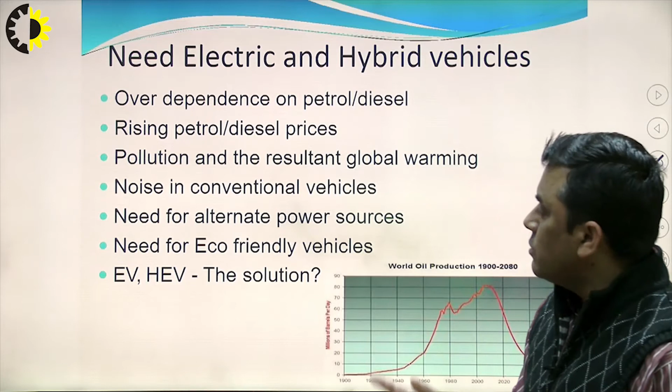So why do we go for electric and hybrid vehicles? These are the reasons why we should go for them. That is why it is included in the engineering syllabus. This is the answer to the need for electrical and hybrid vehicles.

Now what do we mean by this? An electrical vehicle is an automobile that is propelled by one or more electric motors using electrical energy stored in an energy storage device. The primary components of any electric vehicle are the motor, controller, power source, and transmission. This is what we mean by an electrical vehicle.

It means we are going to use electrical energy, and through that energy an electric motor will be governed, which will govern the rotation of the wheel and transmission of power through electrical means. I am not going into much detail of electric or hybrid vehicles, but as per our syllabus, we will discuss only the elementary things here.

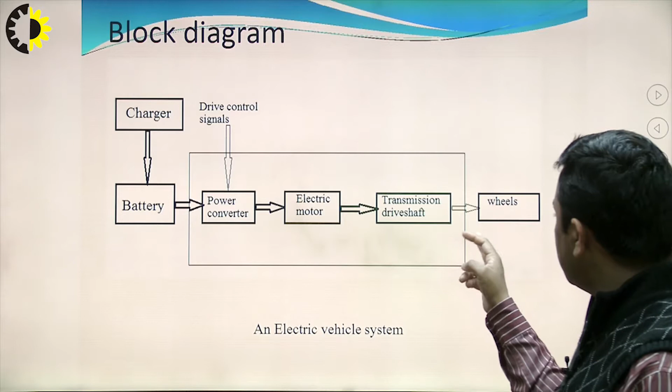So first is why do we need them, second is what do we mean by electric vehicles. This is the block diagram. Obviously if we are using a battery, then there must be a charger, a power converter, then for the power converter there must be an electric motor, then the electric motor controls the transmission or driveshaft, then the wheel. So this is the block diagram of how power is transferred from the battery to the wheels.

We can also see this in terms of components. Motor: generally we use a brushless DC motor which is able to self-start. Controller: to control the brushless DC motor for increasing efficiency, reliability, and battery life. This is the purpose of the controller. Charger: to connect batteries with the electric source.

Contactors: an on-off switch powering up the drive circuit when we turn the key. So when we turn the key, there is a contact between two components, an on-off switch as in our electric switches. It connects and powers up the drive circuit when we turn the key. Battery: rechargeable batteries are generally used.

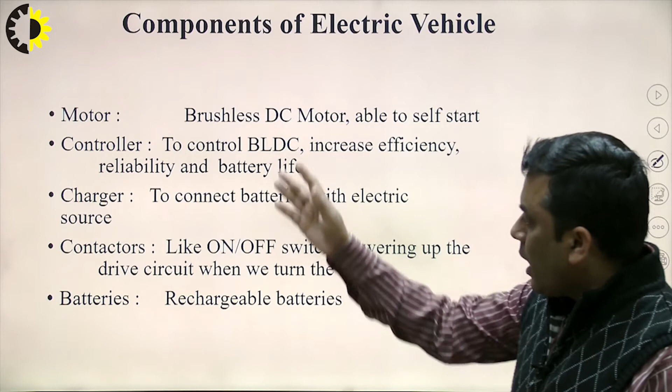I am not going into the specifications of these, because that is related to the design of electric and hybrid vehicles. Here we are introducing only the components and the term 'electric vehicle', why we need it, and what its components are. Which type of motor, what power, how much RPM - I am not going into that much detail, I am only telling you these are the components.

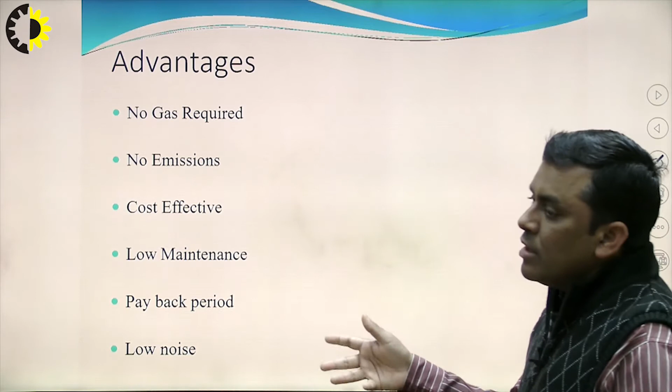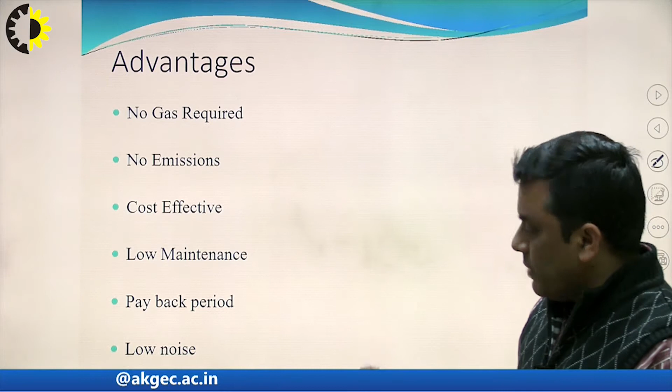Advantages of electric vehicles - obviously need and advantages both are meeting here. No gas required as in an IC engine, no emission, cost effective, low maintenance, payback period is very soon, low noise, because in an IC engine there are a number of components, whereas in a motor there are fewer components, so the noise level will be lesser.

Yes, this is also one of the drawbacks or disadvantages of electric vehicles, but we have to come to some trade off, some optimized solution, so that we can go with an eco-friendly and good solution. So, this is the electrical vehicle.

So, if electric vehicle is not fulfilling the requirement and IC engine is having certain issues, then what is the solution? The solution is hybridization, the concept of multiple sources of power. Here we are talking about two sources: one is the electric source, another is the IC engine.

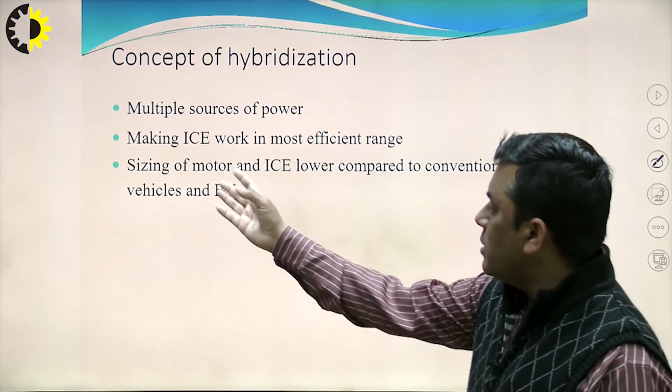So, the concept of hybridization between these two sources means making the IC engine work in its most efficient range, with proper sizing of motor. Motor size is a matter, battery life is a matter, battery recharging is a matter, so we can reduce these issues with hybridization, with sizing of motor and IC engine lower compared to conventional or electric vehicles. This is how the concept of hybridization comes into the picture.

Now, which type of hybridization, how much hybridization do we require? On the basis of degree of hybridization, we can classify it into three categories: mild, medium and full. Mild means they feature idle stop function, regenerative braking is there, but are not capable of using the electric motor to propel the vehicle. This is what we mean by mild hybridization.

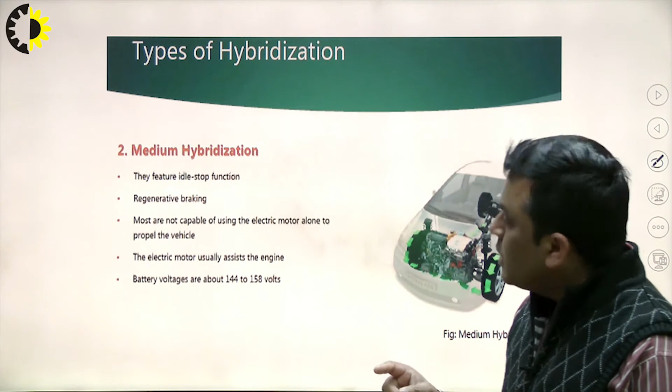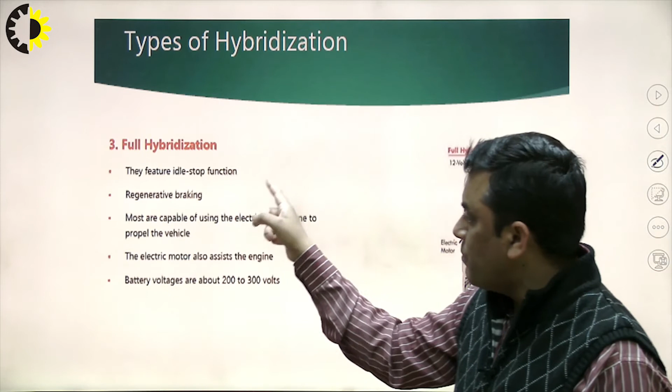If I go with medium hybridization, most of these types are not capable of using the electric motor alone to propel the vehicle. So, not only the electric motor is used to propel the vehicle, but along with the IC engine it can be used. And if I go with full hybridization, most of these are capable of using the electric motor alone to propel the vehicle.

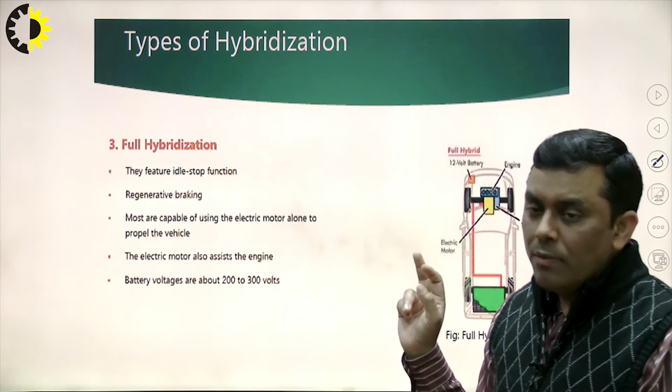So, mild, medium and full. In mild, we are not using the electric motor to propel the vehicle, whereas in medium, not only the motor but the IC engine also. But in full hybridization, the electric motor also assists the engine. This is the meaning of full hybridization.

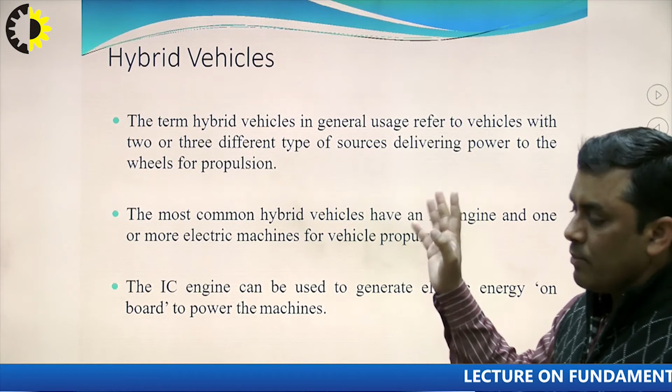Now, if we understand the concept of hybridization, we must understand these terms also. What do we mean by hybrid vehicle? The term hybrid vehicles in general refers to vehicles with two or three different types of sources delivering power to the wheels for propulsion. Two or more sources, if combined together, is hybridization.

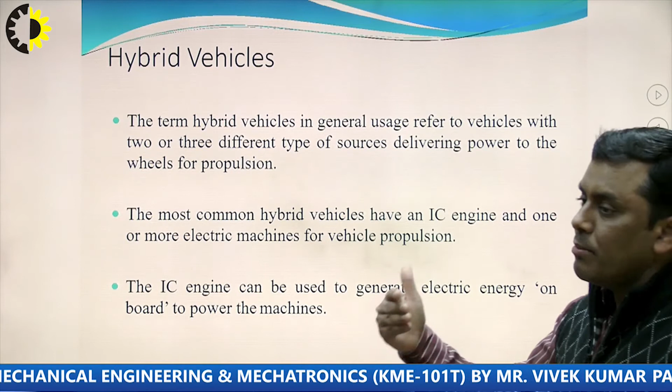The most common hybrid vehicles have an IC engine and one or more electric machines, mainly motors, for vehicle propulsion. The IC engine can be used to generate electric energy on board. When the vehicle is running, electric energy can be generated through the running of the engine, which can be used for charging the batteries and to propel the vehicle also. This is the general concept behind hybrid vehicles.

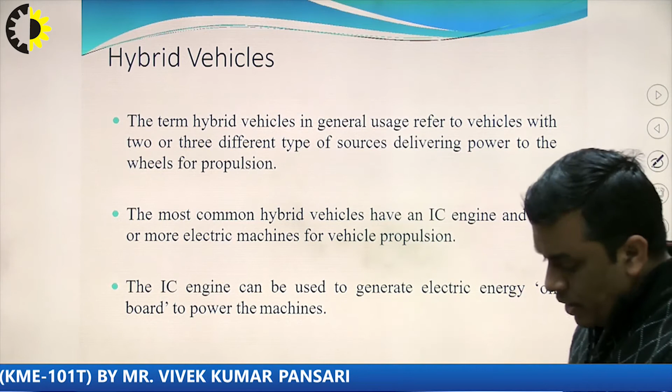Now, how can we classify them? Based on how the energy is flowing: Mechanical Power Transmission Path, MPTP, is the first type which we generally use. Electrical Power Transmission Path, EPTP, is the meaning of electric vehicle. Then we come to the combination, hybridization of mechanical power and electric power, that is combination of MPTP and EPTP. The second type of hybridization refers to how these powers are clubbed together - it can be a series combination, a parallel combination, or a mix of both. We will discuss the advantages and disadvantages of all these in the next slide.

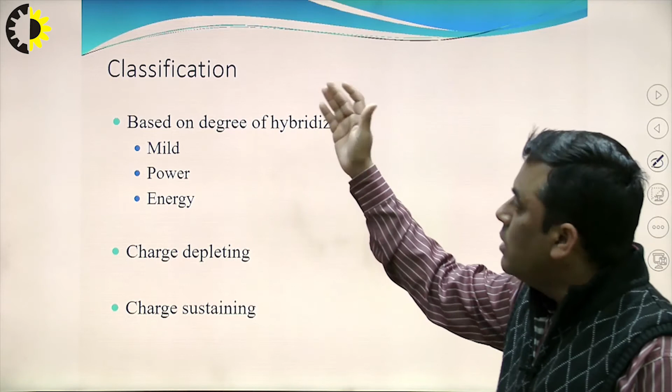Another classification is based on degree of hybridization: mild, medium and full, which we can also call mild, power and energy. Then another classification is charge depleting and charge sustaining. These are various ways of classifying hybrid vehicles.

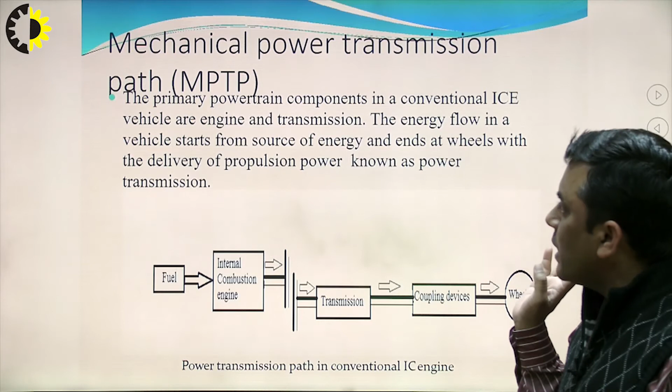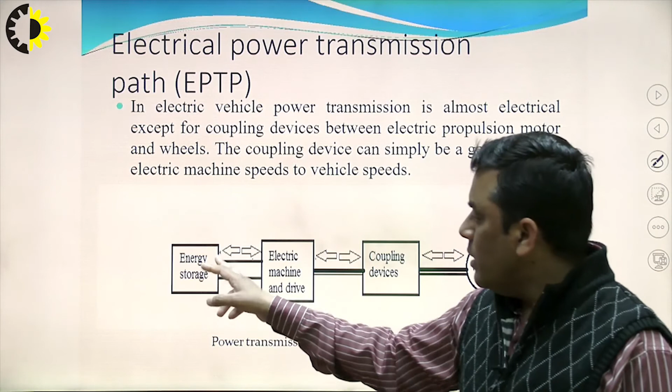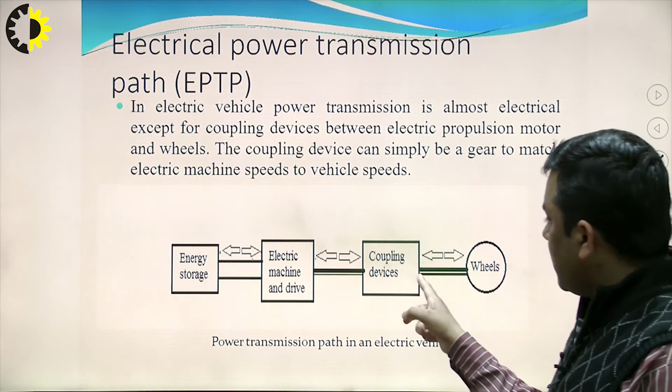Now I am coming to the electrical power transmission path. Here the source is changed. Instead of IC engine, we are having an electric motor or some electric machine. So energy storage is from battery, and that energy is extracted by the electric motor or machine or drive, and it is coupled to some transmission system and transmitted up to the wheel. So in electric vehicles, power transmission is almost electrical except for the coupling device. The whole thing is electrical other than the transmission system. So this is the electric power transmission path.

Now the combination of both MPTP and EPTP. The propulsion power is transmitted to the wheels through either MPTP or EPTP or a combination of both. MPTP is associated with an IC engine, meaning mechanical power coming from the IC engine and transmission, whereas EPTP consists of energy storage. So in the combination, electric energy is stored - this is the electrical part, and the mechanical part is the transmission. So this is the combination of MPTP and EPTP.

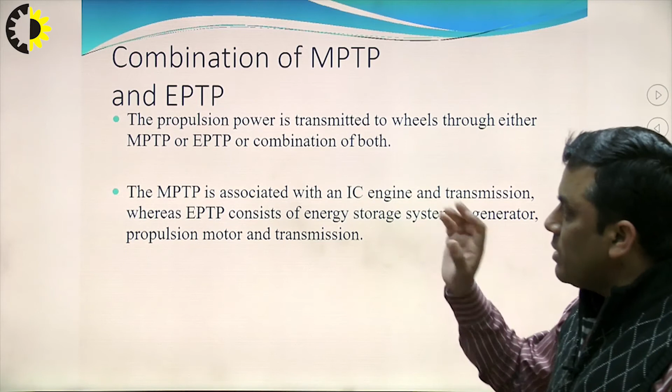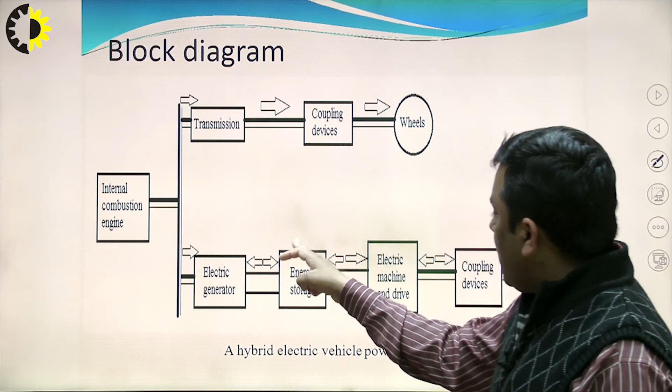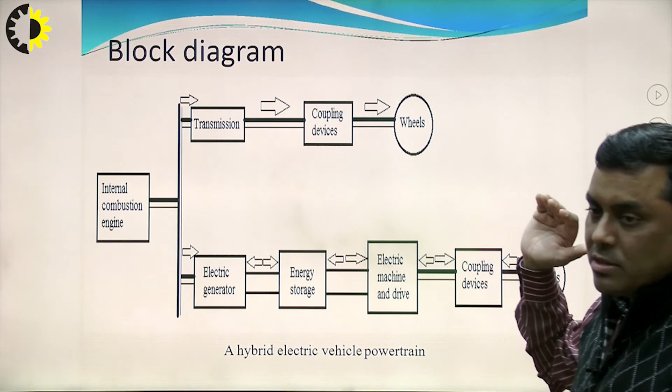So here we can see the diagram of a hybrid vehicle. From the internal combustion engine, power by the burning of fuel is produced. That power can be directly transmitted to the wheels, or that power generated in the IC engine can be used for charging the electrical energy, charging the batteries. So there is an electric generator and electric energy storage, and with the use of some electric motor or electrical machine or drive, it can be transmitted up to the wheels. So it is a combination of MPTP and EPTP, and the power is generated by combustion of fuel in the IC engine.

Now the second type of classification was based on the architecture of the hybridization, how it is. So the first one was the series hybrid electric vehicle. A series hybrid is one in which only one energy converter can provide propulsion power - only the electric motor provides all propulsion power to the wheel. A downsized IC engine drives a generator which supplements batteries and can charge them when it falls below a certain charge level. The drawback is the size of the traction motor.

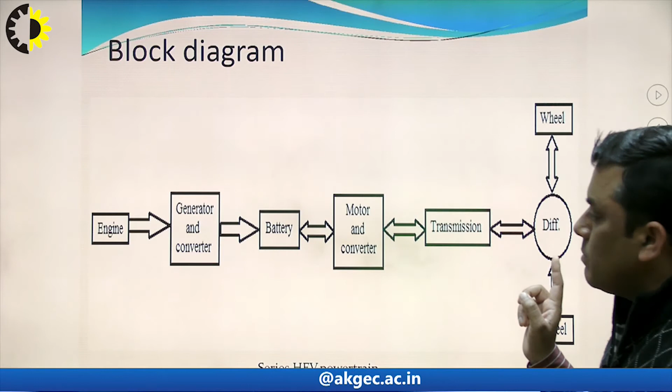Now I am coming to the block diagram, from here it will be more clear. Here is an engine and electric generator, both connected in series. The complete power from burning of fuel which is generated here is transmitted to the generator, it is stored in the battery, and that battery drives the motor, and the motor transmits this power to the wheels. So this is the series combination - here the engine, meaning the mechanical system, and the electrical system both are in series.

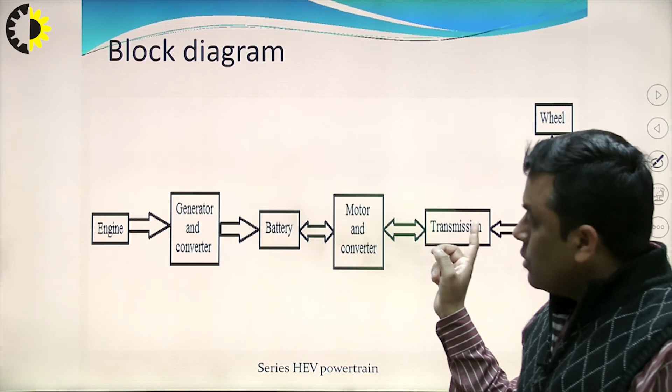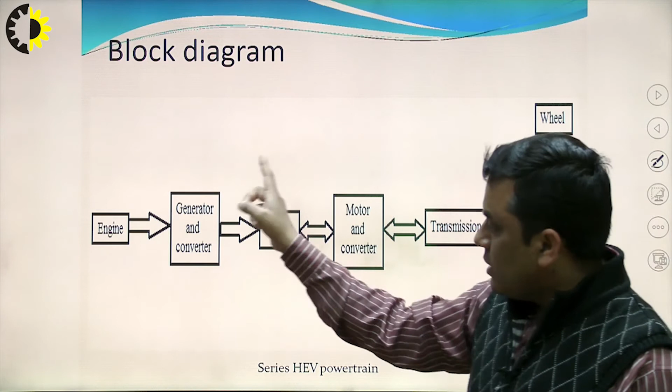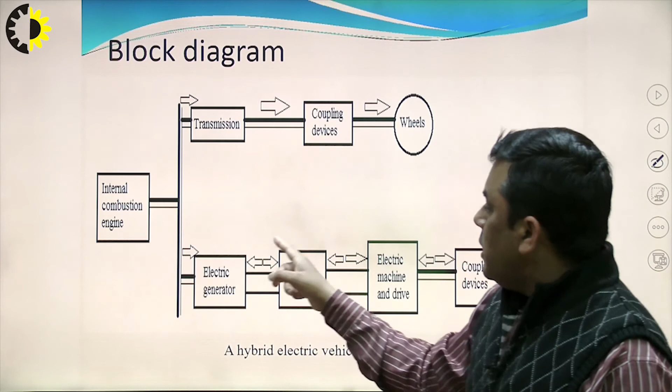So what is this? Only the electric motor provides all propulsion. So obviously when engine and motor are both connected in series, the engine is not directly giving power to the transmission system - the engine is giving power to the motor. Then a downsized IC engine drives a generator which supplements batteries and can charge them, but the engine can be of a small size. So this is the series, here engine and motor both are in series.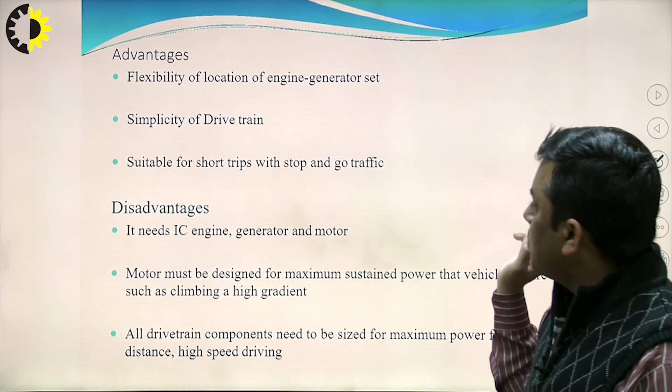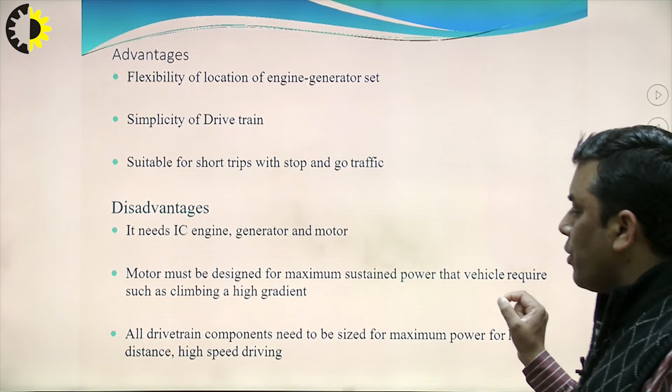Advantages are: flexibility of location of engine generator, simplicity of drivetrain, suitable for short trips with stop and go traffic. Disadvantages: it needs an IC engine, generator and motor. The motor must be designed for maximum sustained power that the vehicle requires. All drivetrain components need to be sized for maximum power for long distance high speed. So this is the series combination.

If I go with the parallel hybrid vehicle, what does it mean? A parallel hybrid is one in which more than one energy conversion device can deliver propulsion power - it means we are having two sources. The IC engine and electric motor are configured in parallel. So this is the meaning of the parallel combination, or parallel hybridization.

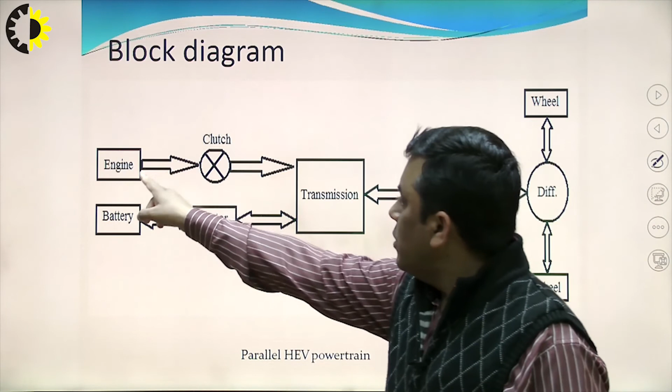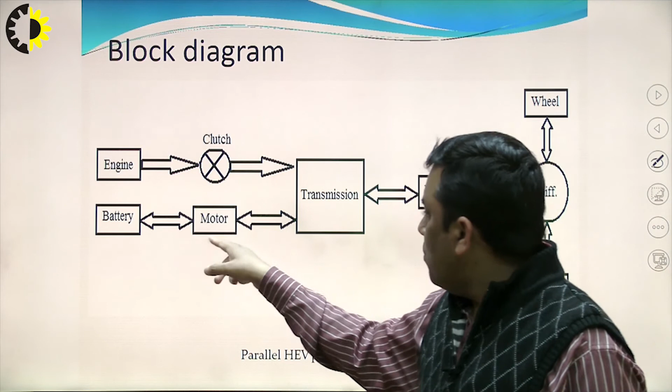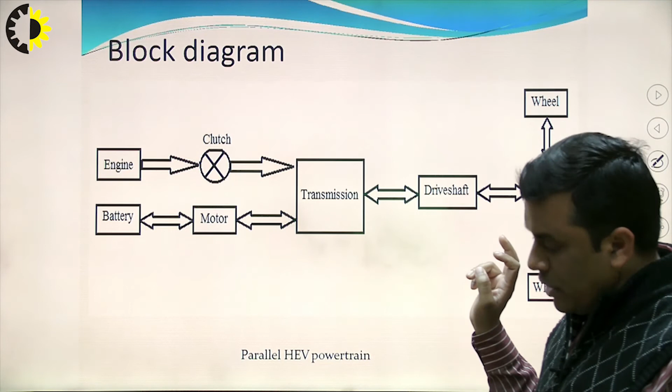So here I come to the diagram. Here is an engine, this engine is supplying power to the transmission system, then for the wheels, whereas it is in parallel combination with the electric system also. Here is a battery which controls the motor, which supplies power to the motor, and that motor is also connected with the transmission system and supplies power to the wheel. So it means there is redundancy in the system - the IC engine is also there and the battery is also supplying power here. This is what is written also: the IC engine and electric motor are configured in parallel with a mechanical coupling.

Advantages: it needs only an IC engine and motor. A smaller engine and motor can be used to get the same performance, but the problem is what? Control complexity increases. How to control the power, how to control the sources, how to change over, how to switch over. So, control complexity increases since power flow has to be regulated and blended from two parallel sources. The power blending from IC engine and motor needs a complex mechanical device to control it. So, this is the disadvantage of the parallel system.

Now, here comes the combination of both. Some advantages of the series system and some advantages of the parallel system we can get. So, it combines the benefits of series and parallel architecture. The power split device divides the output from the engine into mechanical and electrical transmission paths. Even the IC engine is also used to charge the battery. So, we are getting the advantage of both.

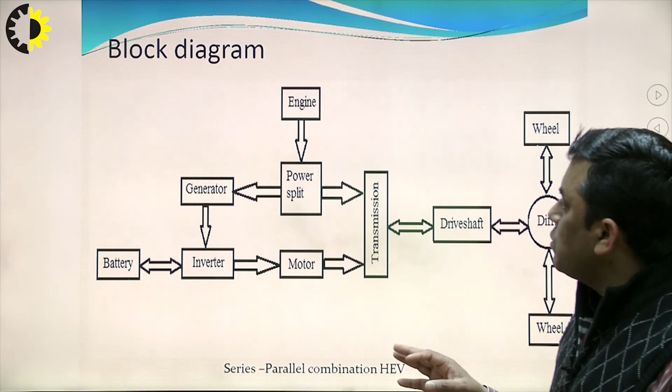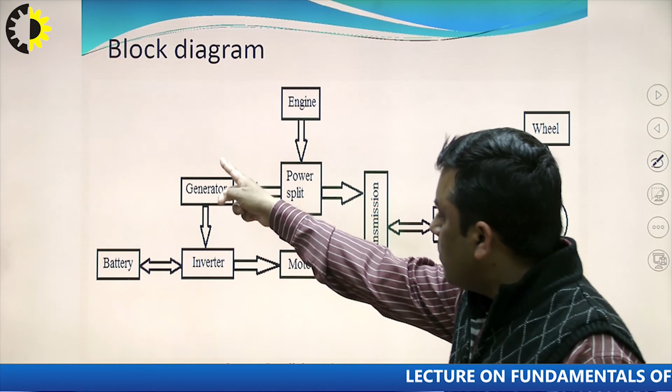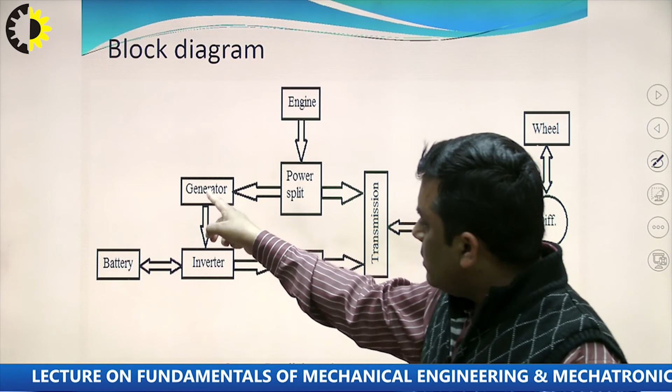So, now come to the block diagram here. Here we have an engine, here is a power split. So, from the engine we are splitting the power in two ways. One is going to the generator and one is directly going to the transmission system. So, some power developed in the engine is used for driving the wheel, and some power is going from generator to inverter and inverter to battery. So, the battery is also getting charged continuously. So, this is the series parallel combination.

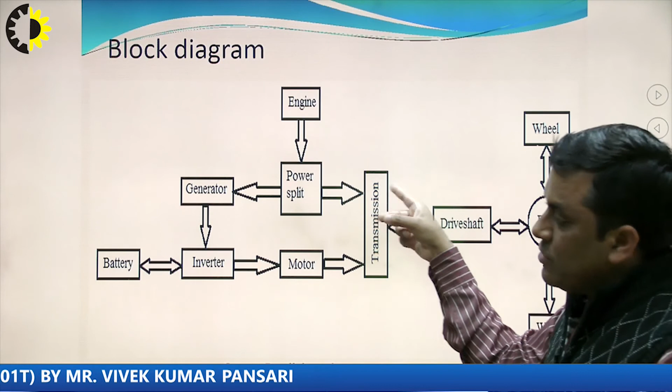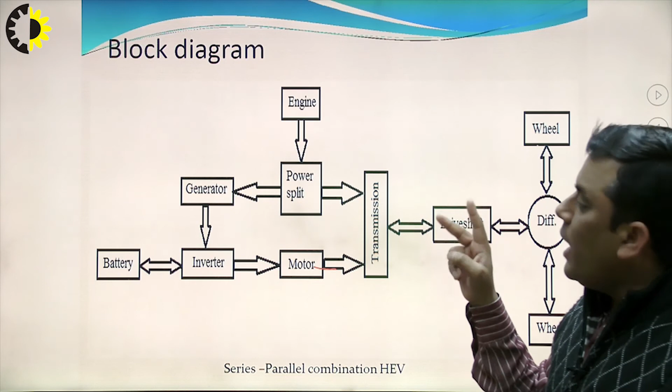In series we are charging the battery with the help of the engine, but in parallel the engine is driving the wheel separately and the battery is driving the wheel separately. We are controlling by some changeover mechanism, but here the engine is charging the battery itself and transmitting the power to the wheels also, and the battery is also transmitting the power to the wheels. So, this is the combination of series and parallel architecture.

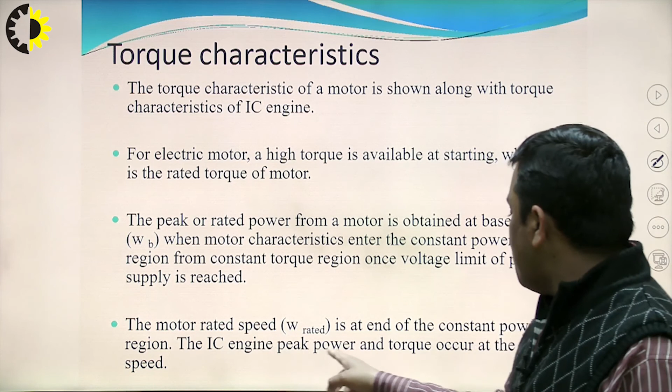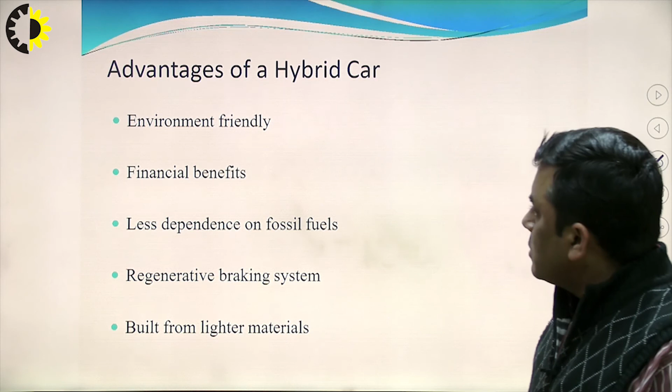But along with some challenges, we do have some advantages: environment friendly, financial benefit, less dependency on fossil fuels, regenerative braking system, built from lighter material. Disadvantages of hybrid: less power, sometimes expensive, yes, initially these are expensive, poor handling because complexity is more, and maintenance cost, because with two types of power transmission system there is heavy maintenance.